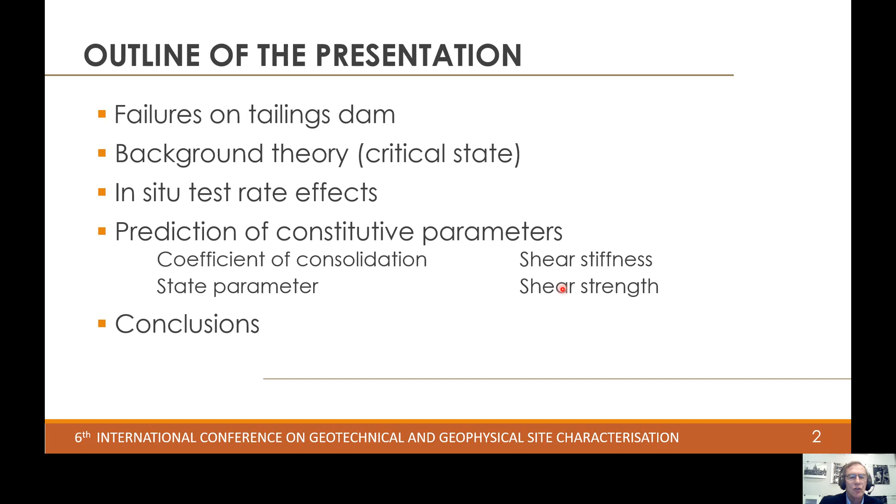The outline of the presentation is fairly simple. I'll set the grounds by discussing some experience gathered from the failures of tailing dams before moving to other technical issues, covering the background theory for the interpretation of in situ tests, concentrating on rate effects, which is a requirement for the prediction of constitutive parameters. I'll make then some brief comments on how to predict the coefficient of consolidation, state parameter, shear stiffness, and shear strength before heading to conclusions.

As an introduction, I'll try to give a general perspective of the topic, always from the geotechnical point of view. I'll start by sharing some of my personal experience that involved studying the two major recent accidents in Brazil, the Fundão and the Brumadinho Dam. I'll try to briefly highlight the lessons learned from these accidents and how they're guiding our research efforts in Brazil, which is somehow reflected in this presentation.

The Fundão Dam is an upstream construction that failed in November 2015, releasing over 45 million cubic meters of mine tailings and killing 19 people. An investigation was performed to determine the causes of the accident by a review panel that was led by Professor Morgenstern.

Field evidence have been gathered, advanced lab testing performed, and the work was supported by sophisticated computer modeling. I should remember that the structure was well maintained, monitored, and documented, although the review panel acknowledged that that structure was vulnerable by a series of unplanned occurrences.

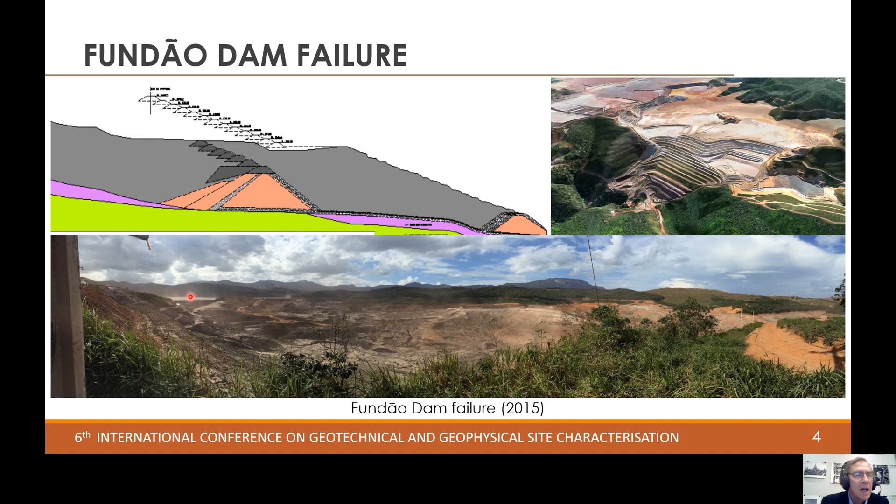This is a general view of the area two weeks after the accident, and in the background you can see the Germano Dam, which is a twin dam that is operating in the same location.

As for the Brumadinho Dam, there are some similarities, but it's worth mentioning that there were no risings after 2013, and tailings disposal ceased in July 2016. So the Brumadinho Dam was decommissioned for more than two years and a half before the accident that killed 270 people.

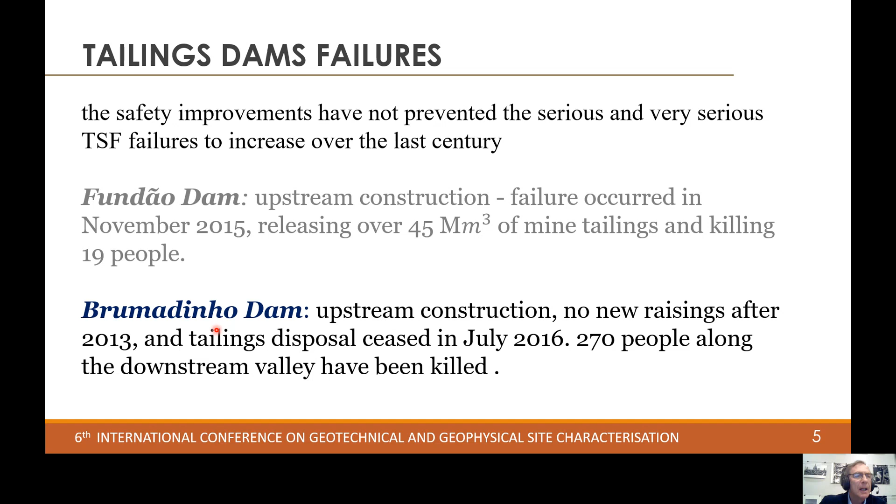Insights as to the reasons of this 2019 accident were summarized in a causation report that was led by Professor Peter Robertson. The material was described as having a brittle response, which was attributed to iron oxidation.

This failure was triggered by a critical combination of ongoing internal strains due to creep, combined with the loss of suction in the unsaturated zone that was caused by intense rainfall towards the end of 2018. Let's accept that identifying creep strains taking place inside a reservoir is not an easy problem to be approached in terms of design and in terms of evaluating risk.

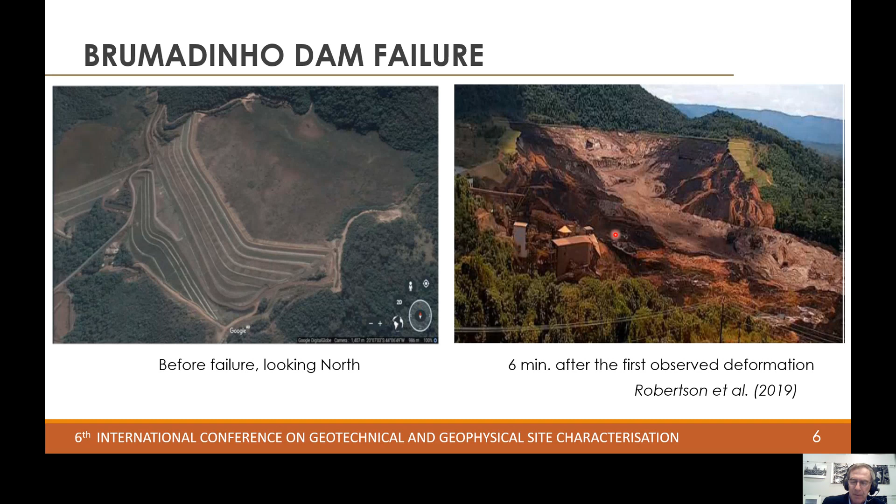Interestingly, another independent report was issued by the Brazilian Federal Police that was working in combination with an international research group, and they reached a different conclusion, attributing failure to ongoing drillings for in situ testing and for installation of instruments. So what are the lessons that one can take from these two accidents?

In both cases, we're talking about tailings that were hydraulically deposited, were non-plastic materials, and were known to exhibit high potential for liquefaction. There were no warnings in both cases. These failures have not been anticipated by the instrumentation. And in both cases, the trigger was not easily identified.

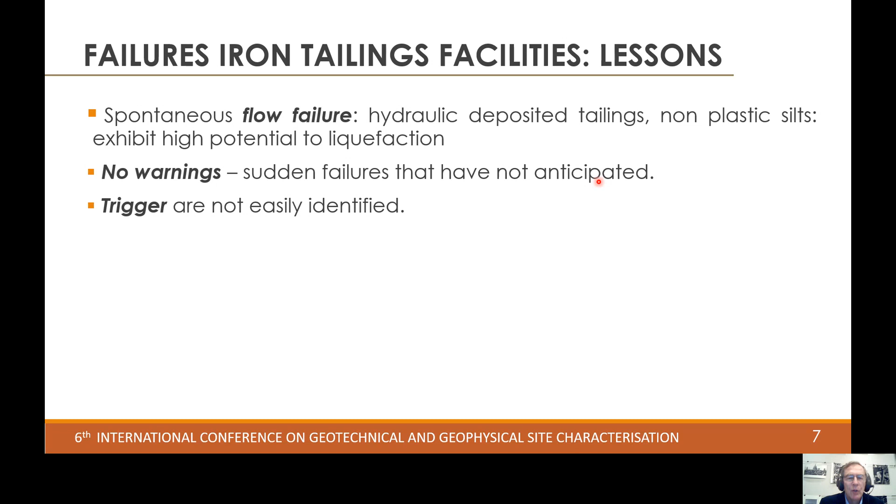I was talking about the ongoing debate on the Brumadinho failure. Although the mechanism itself was not easily perceived, we know that it is geotechnical. So it's up to the geotechnical community to react and improve our ways of estimating the strength, the stress, strain, and strength behavior of these materials, and to identify their contractive response.

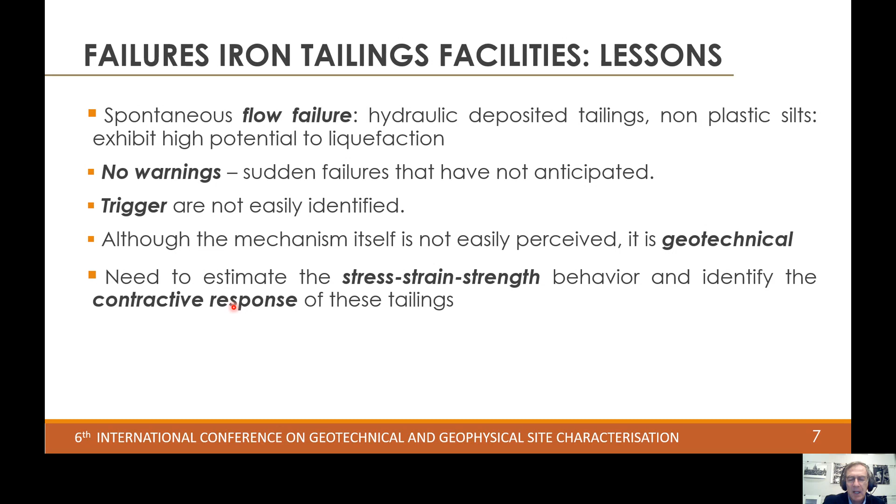And that's exactly the aim of the present presentation. I'll then move to more technical issues, as I mentioned before, and I'll start with critical state soil mechanics.

There is no intention to review the theory, but just to highlight some aspects of behavior. The mechanism of soil liquefaction, or the stress-strain behavior of this material, can be described by critical state soil mechanics without requiring new soil properties or concepts to be added.

I'll illustrate this behavior by the results of triaxial compression and extension tests performed in gold tailings. From these tests, we could derive the critical state line, and there are some important aspects to discuss. The first is that the tested tailings show a unique critical state line, which is one of the axioms of critical state theory.

But there is a characteristic feature of these tailings: the critical state line exhibits a marked curvature dictated by transitions of state, going to full liquefaction, to flow instability, to a stable zone, and eventually to particle breakage at very high stresses.

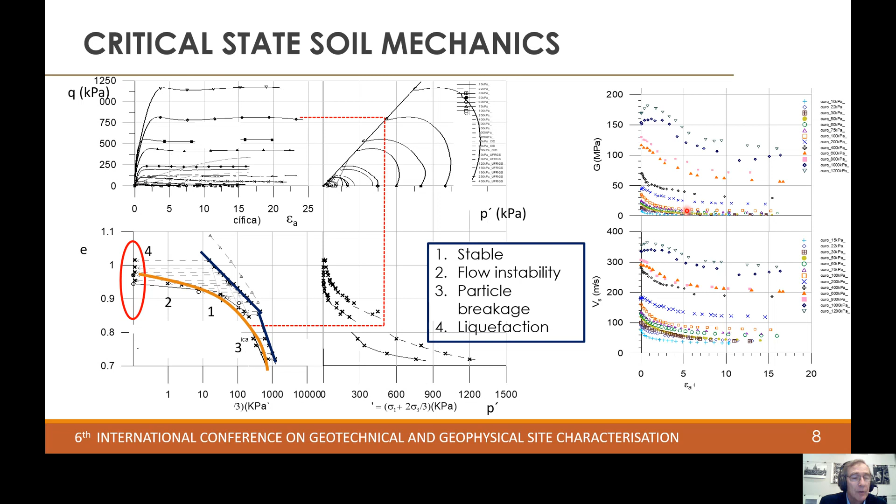An additional feature worth mentioning is the requirement for measuring the shear stiffness by bender elements, because strength and stiffness are coupled, and by coupling these two quantities we improve our ability to derive soil properties from the interpretation of in situ tests.

There are more than 20 to 30 constitutive models developed for sands, some of which have already incorporated nonlinear equations to express the shape of the critical state line. So what is the question mark?

We aim at determining the constitutive parameters in tailings, combining in situ and lab tests, having critical state soil mechanics as the background theory. For lab tests, we can use undisturbed or reconstituted samples, but given the difficulty of retrieving undisturbed samples in silty sands, one usually resorts to reconstituted samples.

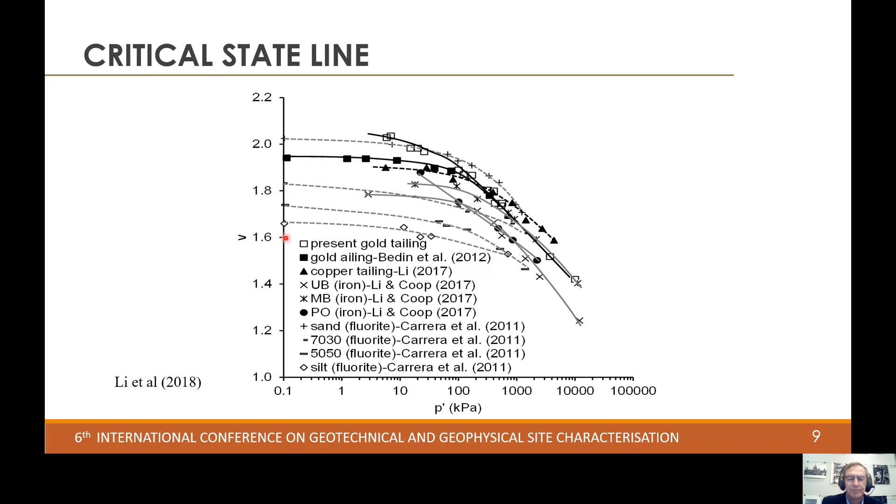We are now moving to in situ tests, and we will concentrate on rate effects, because in these intermediate permeability materials, the standardized testing rate may lead to partial drainage, and thus to erroneous estimation of undrained parameters.

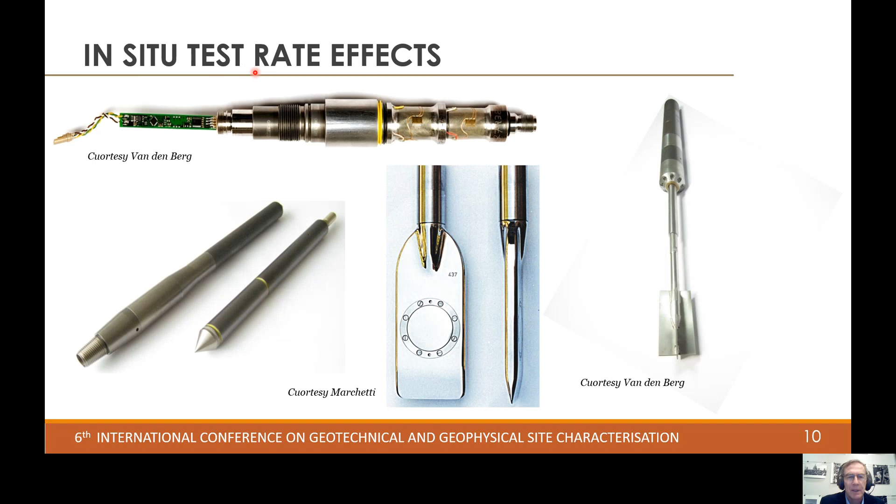We do that by expressing results of different in situ tests as a function of the normalized velocity. The normalized velocity is a classical concept that comes from pore fluid pressure diffusion in linear poroelastic mediums.

There are several expressions proposed on the basis of this concept, and they all capture the key elements needed for in situ testing interpretation. Here you find one example that relates the normalized cone resistance to the normalized velocity. This plot combines centrifuge, calibration chamber, and field tests.

A simple observation of the reported data shows that the influence of partial drainage on cone resistance is significant in all materials. If you see the red line, which represents gold tailings, this is the normalized cone resistance representing the drained value relative to the undrained value, taken at a much higher normalized velocity.

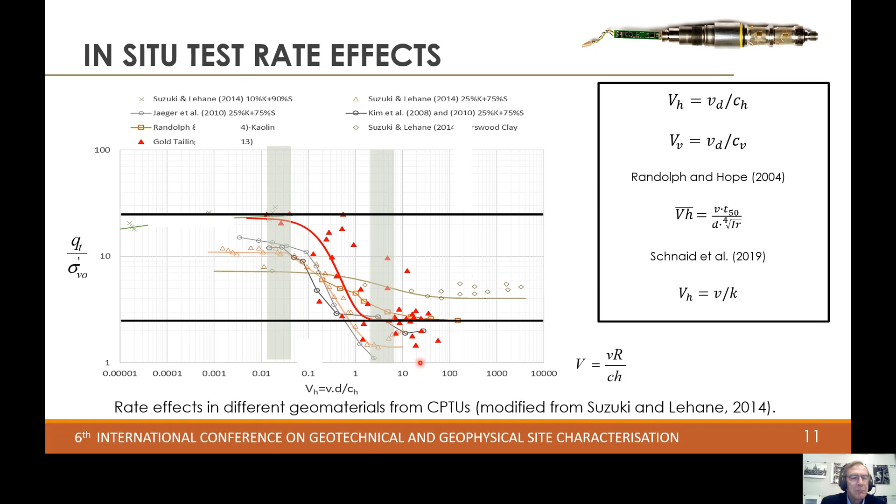So I think you're kind of familiar with this concept, and the idea is how to approach this problem in engineering practice. There are essentially two alternatives to be considered.

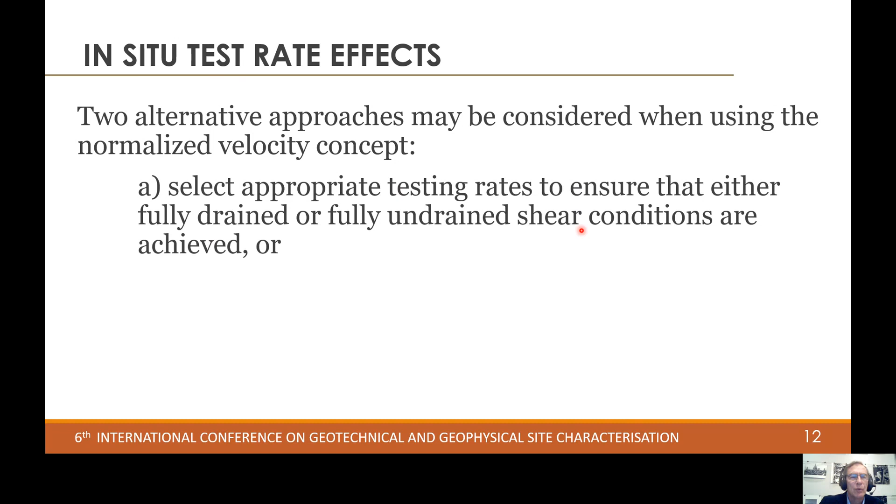The first alternative emerges from the previous explanation: non-standard penetration rates or testing rates may have to be selected according to local experience, in order to ensure that either fully drained or fully undrained shear conditions are achieved.

But there is another alternative, one that I think is required and has not been extensively discussed by the geotechnical community. There is a large, comprehensive database of in situ tests carried out according to international reference test procedures. I think the question is whether we are able to correct these in situ measurements to account for the possible errors induced by pore pressure dissipation. This latter approach will be discussed herein.

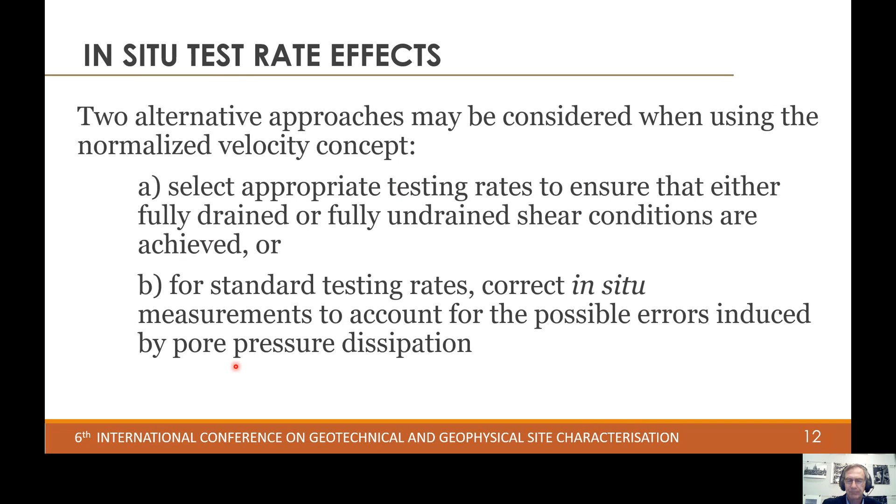I'll show this by looking at different in situ tests, starting with piezocone tests, by the interpretation of piezocone tests. I'll start by quantifying the maximum error in calculating the shear strength, given by calculating the normalized drained-to-undrained cone resistance, which is here plotted against the internal friction angle.

The predictions are based on a fairly simple rigid plastic model that has been calibrated against recent published data, including tailings. As you can see, this model prediction yields a ratio of drained to undrained cone resistance on the order of 10, or as high as 10. This ratio can be approximated by an exponential function. So when trying to make corrections, one has to be careful.

It needs engineering judgment because this correction can be quite high. But besides, it's possible to provide guidelines for design by directly correcting the tip cone resistance recorded at the standard penetration rate of 20 millimeters per second in order to calculate an equivalent fully undrained penetration resistance. This is done also by a fairly simple expression that is a function of the internal friction angle and BQ. So the proposed expression should be seen as a first approximation supported by experimental data that stands until more rigorous solutions are derived.

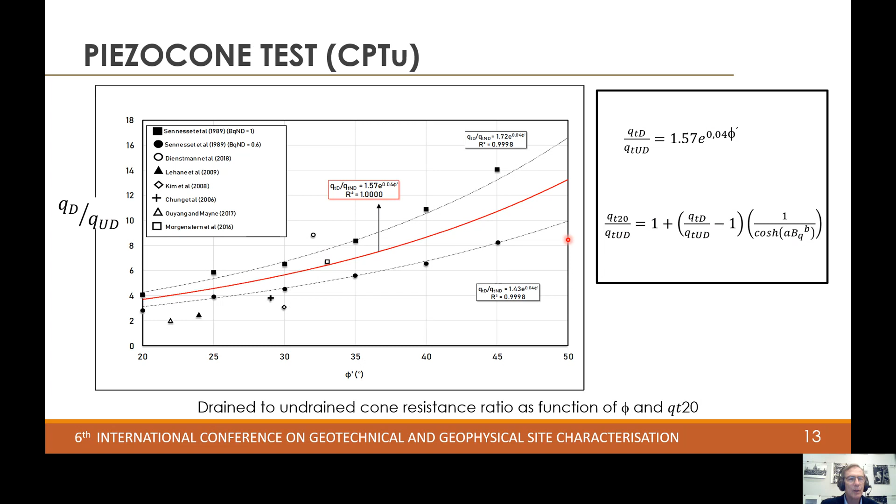So this was the first example. The second example is related to the vane test, to field vane tests. And I suppose that this is a fairly important and interesting test to be discussed because it is a reference test for clays. But the standard rate of vane rotation of 0.1 degrees per second that ensures undrained conditions when shearing clays may not be applicable to estimate these values in silts, in transitional soils.

So we've got to evaluate what is the possible error that is inherent to this type of test in silty tailings. This is one example. You see some results where the torque is being measured at different rotation rates. But when one tries to evaluate the drained curves from the measured torque expressed as a function of the normalized velocity, there is an experimental problem.

For being able to go from undrained to drained torques, we would have to increase the rotation rates by 1,000 times, which we are still unable to do. So the alternative is not relying just on measured data, on experimental data, but we have to extrapolate the curve to get an entire description of the drained conditions taking place on a rotation vane.

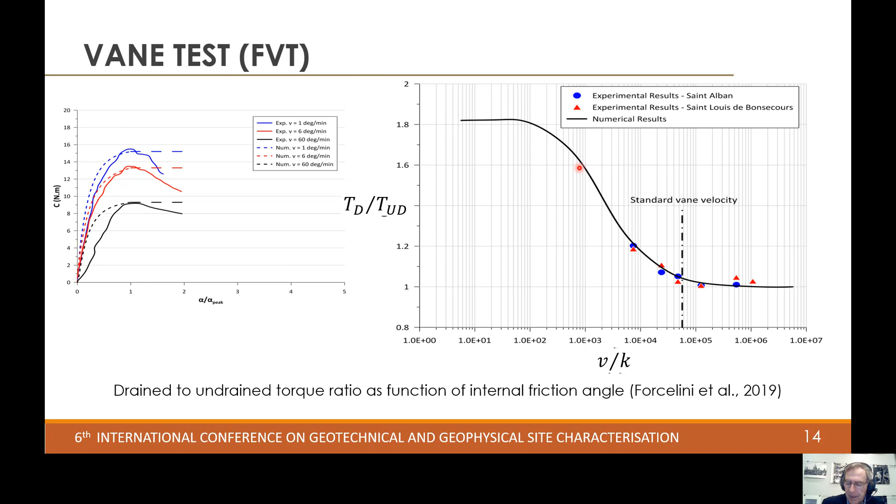And this has been done in this particular example, considering a poromechanical analysis of consolidation induced by the rotation not of a vane, but the rotation of an infinite long rigid cylinder embedded in a porous medium. And the results are quite interesting. The study demonstrates that the ratio between the drained and the undrained torque is governed by the internal friction angle.

The model predictions are generally lower than 2, some of this order, which is much lower than the values calculated for the piezocone. This can be explained by the fact that the volumetric strains induced by vane rotation in a drained regime are moderate in comparison to values calculated by cavity expansion, which is related to the piezocone. So corrections are relatively small, and we may be tempted to use this type of approach for correcting the vane tests.

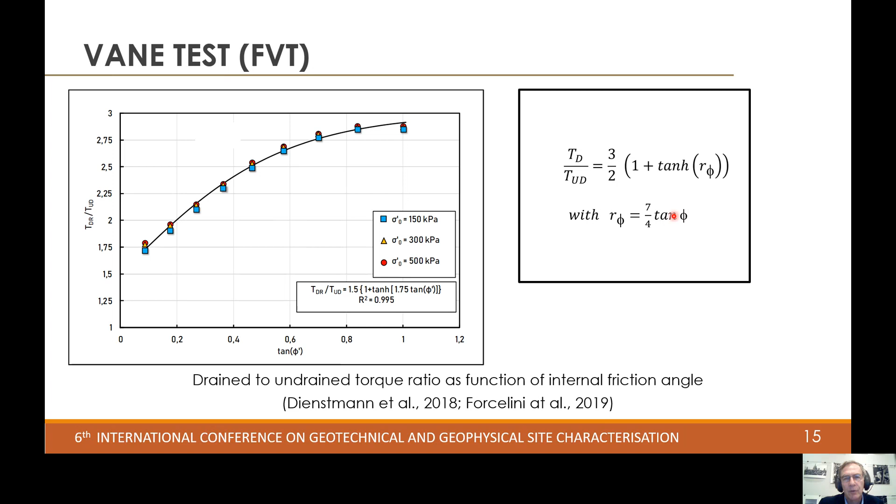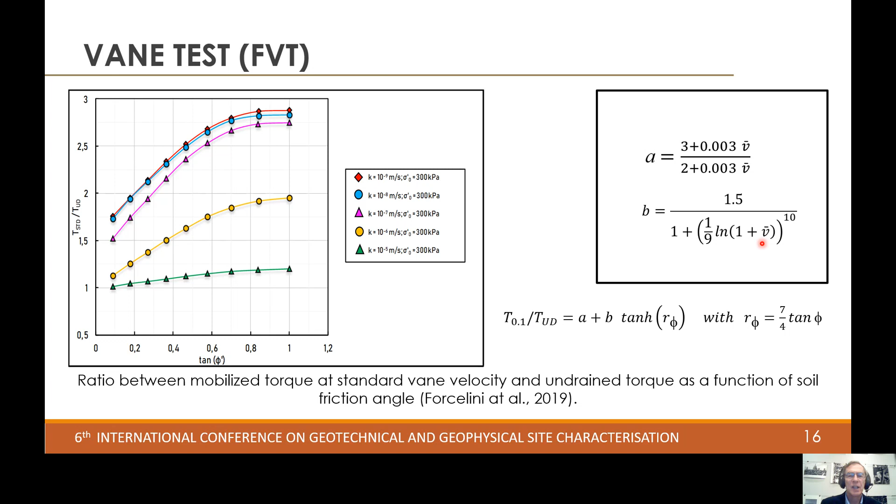Incidentally, the ratio is described by a hyperbolic function expressed, of course, as a function of the friction angle. If you want now to extend this approach to formulate an approximate expression to correlate the measured torque, or the torque measured at a standard vane velocity, in comparison to its counterpart under undrained conditions, it is also possible, and is expressed by a very simple equation that's a function of the internal friction angle and the normalized velocity. So this is a ready-to-use equation if one tries to derive soil parameters from vane tests in silty soils.

I'll now move to something that's slightly different, because with the dilatometer, it's not possible to make a correction of the test data. But what we have to do is an adaptation of test procedures. To be fair, since the early days, Silvano Marchetti has acknowledged that in transitional soils, the after-installation DMT readings are changing continuously with time due to excess pore pressure dissipation.

So we are using this decay curve for what is being called an integrated approach. After completion of the pore pressure dissipation at the minimum lift-off pressure, the membrane can be inflated, and these values can be used to derive or to estimate the internal friction angle. Alternatively, we can extrapolate this curve back to the origin to get an equivalent undrained lift-off pressure, and this can be used to predict the undrained shear strength.

Of course, as for the CPT, if the penetration process of the DMT is partially drained, the extrapolation to determine this value will be incorrect. There is a new device, and I would like to call your attention to that, the Medusa DMT, that is able to monitor the variation of A-reading with time, and that enhances our ability to use the DMT for interpretation of testing data in silts.

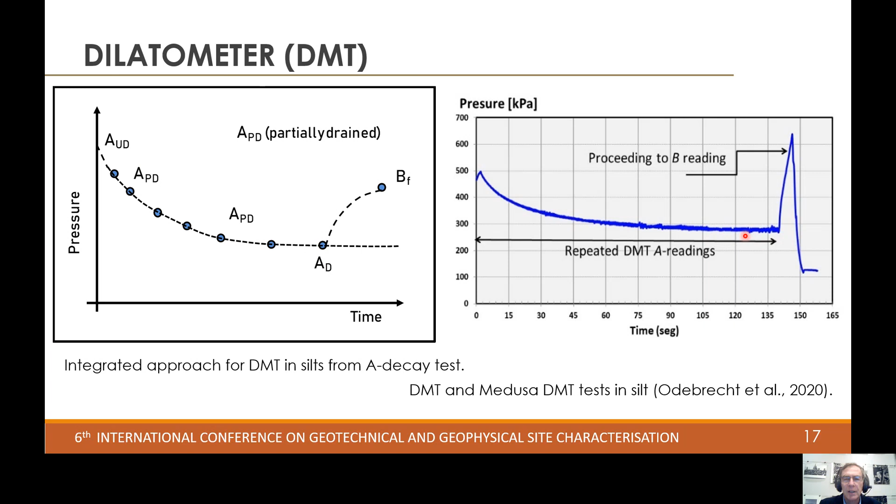I'll finally move to the standard penetration test, which is a slightly more complicated and controversial issue, but I'd like to make some comments on that. When you talk about dynamic penetrometers, we know that the results exhibit poor repeatability. There is a lack of standardization of test procedures and unknown values of energy delivered to the SPT rods, as well as variable penetration rates during a single blow, which are limiting factors that may result in misleading predictions when using this information.

As a means of assessing liquefaction, the SPT fulfills the need for retrieving disturbed soil samples to determine the water content, fines content, and Atterberg limits. But in granular soils, there is another alternative which I like to highlight for you in this presentation.

For tests carried out under drained conditions, we developed a rigorous solution to circumvent some of the inherent limitations associated with SPT interpretation by calculating a dynamic force. This force is simply calculated using the principles of energy conservation and wave propagation analysis, with no empirical or adjustment factors.

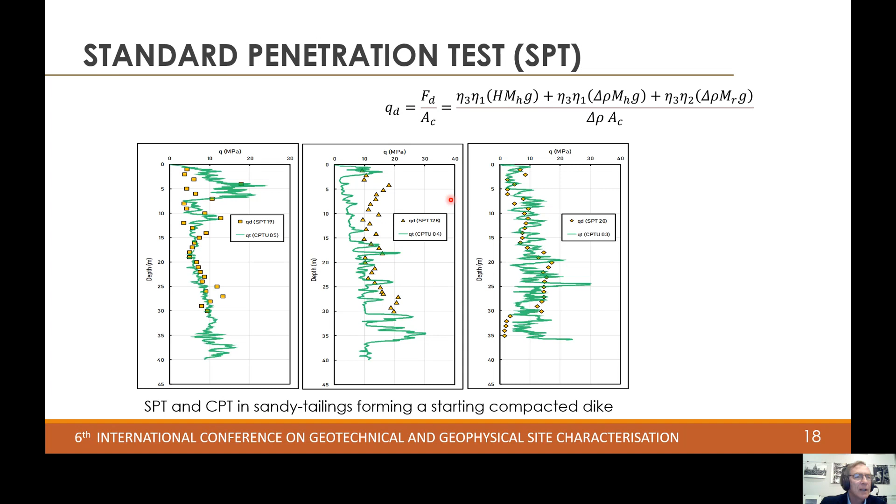So when using this dynamic force, we can calculate an equivalent dynamic penetration, and we can compare the results of the SPT with the results from the CPT, which are shown here in green for several logs carried out on a dike. You see that in this particular example, there is a consistency between SPT and CPT records that allows a direct comparison between all these tests.

So we do analysis and account for rate effects, and we are then able to derive constitutive parameters in tailings. There are two major principles for that. First, rate effects have to be considered either by correcting the measured data or by making adaptations in test procedures, which we have discussed previously. Second, there is a need to combine field and lab tests.

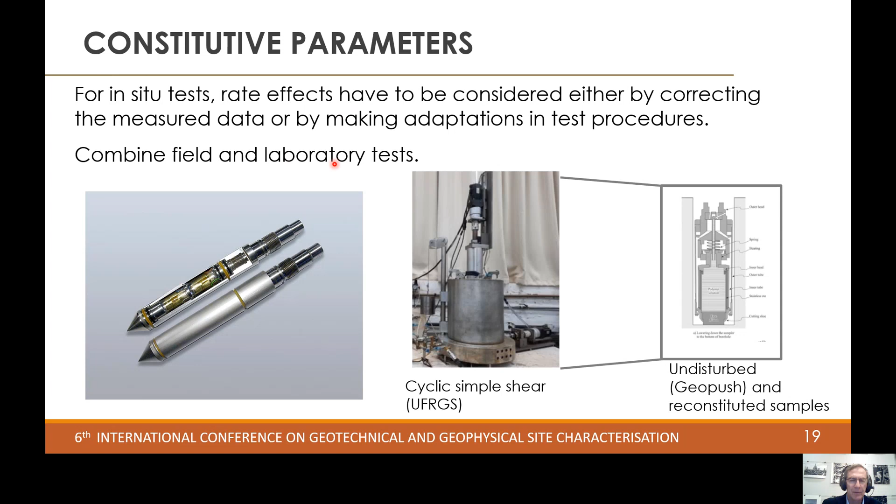So let's give some examples. Some of them I will discuss briefly, and some I will concentrate on in a slightly more detailed way. We can look at stiffness.

If you talk about soil stiffness, it is well recognized that geotechnical site characterization can be improved by independent seismic measurements, adding the downhole shear wave velocity to the other in situ testing data. As a matter of fact, the small strain stiffness G0 is among the most reliable and easy constitutive parameters to measure, both in the field and in the laboratory.

Conversely, if you look at the coefficient of consolidation, this is more complicated because partial drainage effects during piezocone penetration may violate the boundary conditions assumed in the interpretation of piezocone dissipation tests, whether using one-dimensional cavity expansion or two-dimensional strain path methods, from which both contractive and dilative soil response can be modeled. And this is not to mention the uncertainties in determining the phreatic surface location in tailing dams. So you see that the approach for each of these parameters has to be properly evaluated from some physical assessment of what is involved.

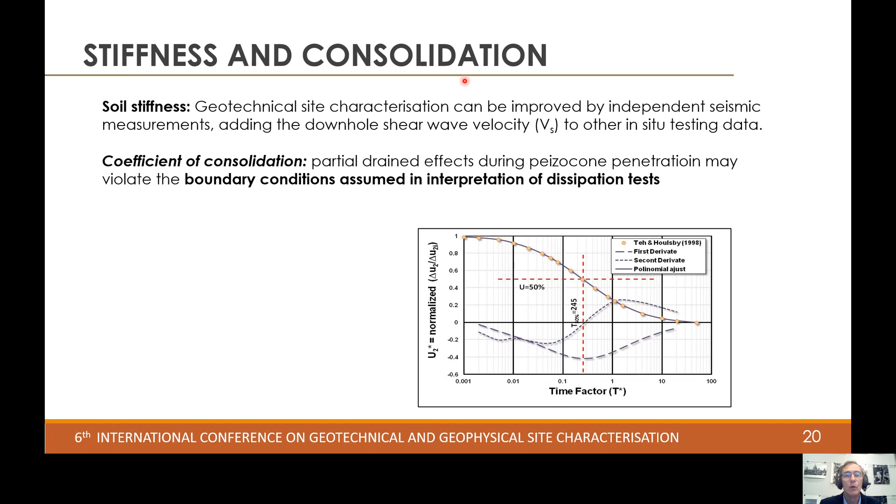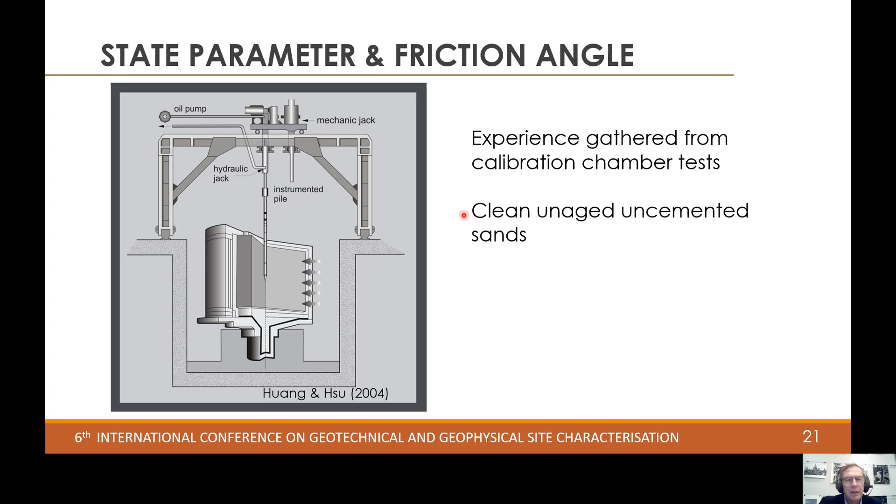In the interpretation, if we move to drained properties, we can look at the state parameter or the internal friction angle. And I recall that here we rely less on theory and more on experience gathered from calibration chamber tests, recalling that most of the tests were carried out on clean, unaged, uncemented sands.

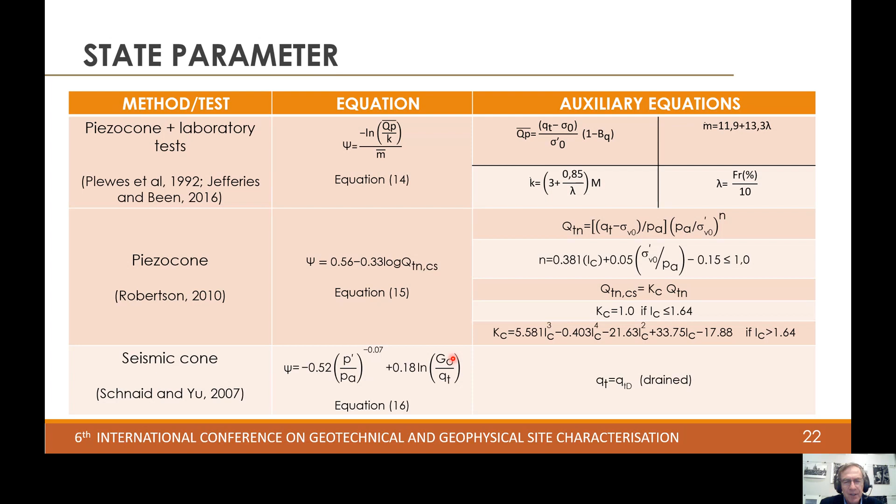As a matter of fact, current engineering practice when trying to derive the state parameter relies heavily on correlations established from CPT measurements, as you can see here from the work of Jefferies, Been, and co-authors, or Peter Robertson. But there are other alternatives, such as the seismic cone, in which the state parameter is assessed from a combination of G0 over QT, a small to large strain ratio, which enhances our ability of deriving the state parameter. We can also rely on the cone pressuremeter or on the dilatometer. These are ready-to-use equations that are generally used in engineering practice.

But I'll try to illustrate the state parameter variation derived from seismic CPT tests carried out on a beach very close to the upstream face of a tailings dam, towards the right and left abutment respectively. And as you can see here, it's interesting because the two CPT-based methods yielded fairly similar trends. But by adding the contribution of soil stiffness, the SCPT-based state parameter variation agrees sufficiently well with the CPT values in the right abutment, but indicates a predominance of dilative tailings in the left abutment.

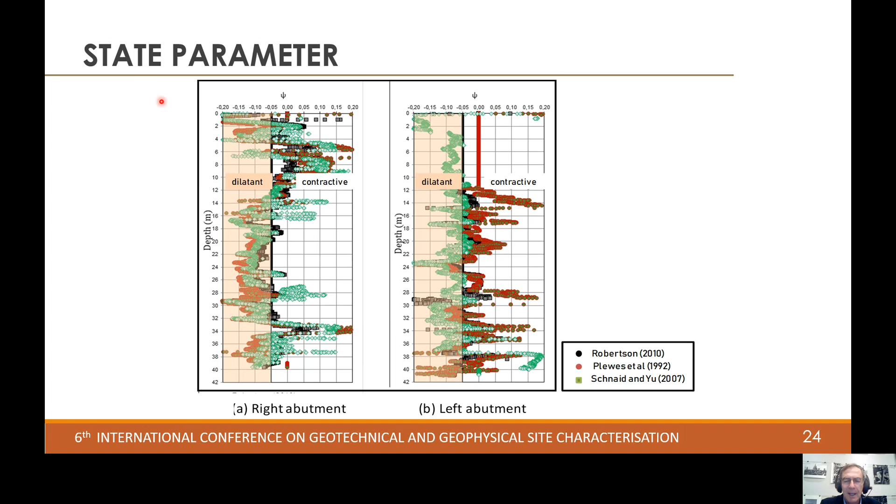So why am I bringing this example? It's to draw your attention to the fact that none of these methods give a correct estimation of the state parameter in non-plastic silty tailings. They should be seen as an approximation because the influence of fines is not completely understood, and cavity expansion methods used to calibrate these approaches were essentially based on clean sand. So this type of approach should be viewed as a first step, guiding the need for further investigation.

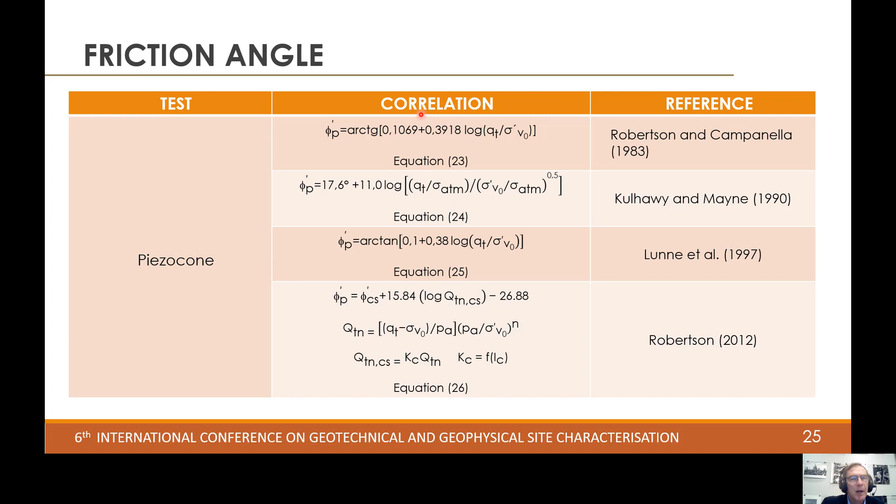I'll make some comments on the internal friction angle, but I think they're fairly similar. Correlations with cone tests are widely used in engineering practice to derive internal friction angles, but alternative methods include the seismic cone, the cone pressure meter, the dilatometer, and even the SPT.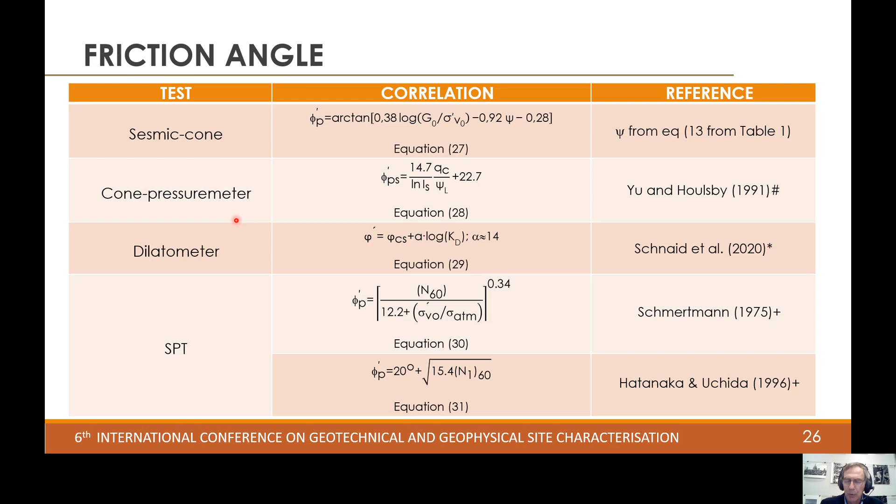But recall what I was saying for the state parameter. For the same reasons, these correlations should be viewed as a first approximation in silts or silt tailings. So as a general recommendation, apply these correlations in silts using the critical state friction angle as a reference value. In other words, always carry out triaxial compression tests to determine the critical state friction angle, and then compare your correlations against this property, which is easily determined from different materials.

As a guideline for design, we try to establish a correlation between the critical state angle and the mean particle size for different non-plastic tailings. As you can see, most internal friction angles for different silty tailings fall within a narrow range of about 31 to 35 degrees, despite the variability in mineralogy and particle shape expected for this material. This scatter seems to be much lower than the one observed for sands.

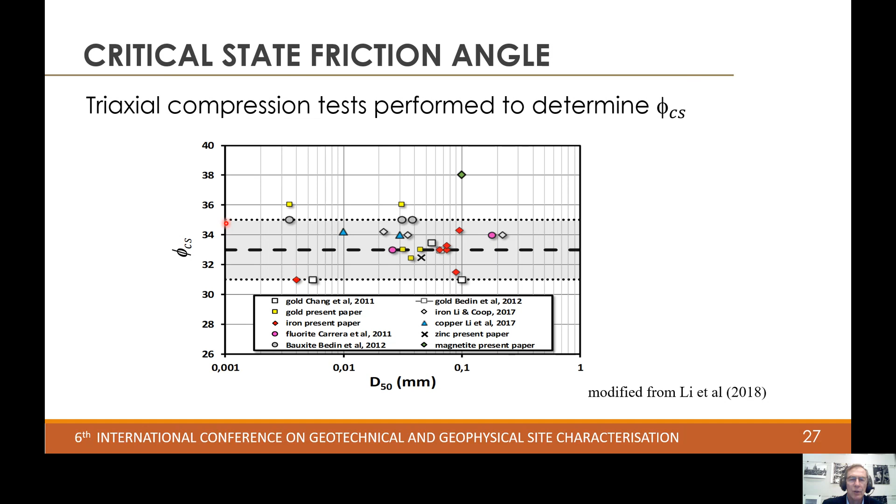We can now move to the final part of this presentation, to make some comments about our ability to predict undrained shear strength. We know that undrained shear strength in tailings, as in all soils, depends on the mode of failure, the rate of shearing, soil anisotropy, and stress history. Therefore, it is not a unique soil parameter, being strongly dependent upon the method by which it is determined. This is a problem, but on the other hand we can rely on the concepts of critical state soil mechanics as long as rate effects are properly taken into account.

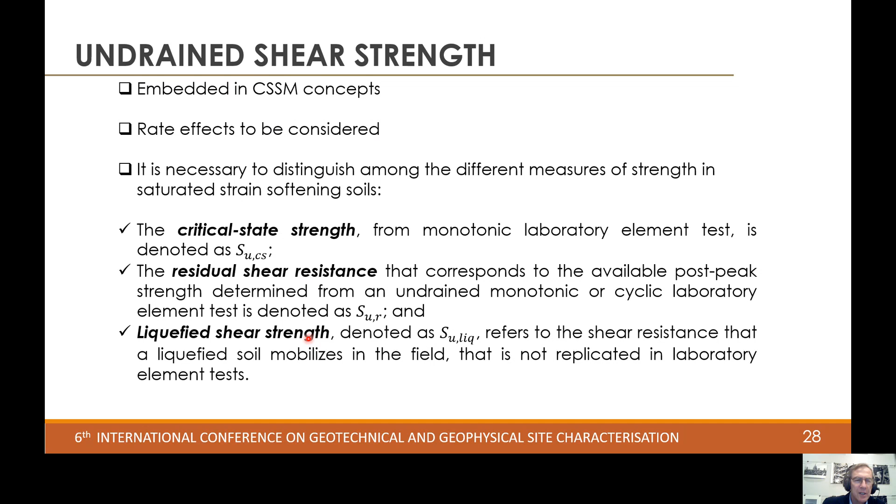However, there is again one complicated issue. In discussing the shear strength of liquefied soils, it is necessary to distinguish among the different measures of strength in saturated, strain-softening soils. We can be talking about the critical state strength, the residual shear strength, or even the liquefied shear strength, which incidentally is not replicated in lab element tests. So let's see how we approach this value.

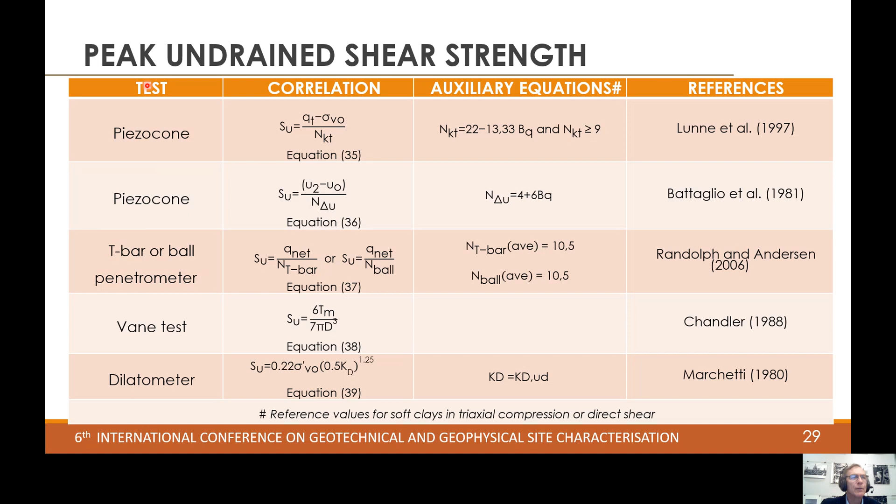If we are talking about the peak undrained shear strength, we are on familiar ground, so I don't have to extend on that, because we know we can rely on the piezocone, the full-flow penetrometers, the vane tests, or the dilatometer to derive these quantities using well-known equations.

However, estimating the residual post-liquefaction undrained shear strength is another matter if we're talking about materials susceptible to liquefaction. Essentially, that's not even a geotechnical problem - it's more related to soil rheology, because the material behaves as a non-Newtonian fluid. So current engineering design practice tries to overcome this.

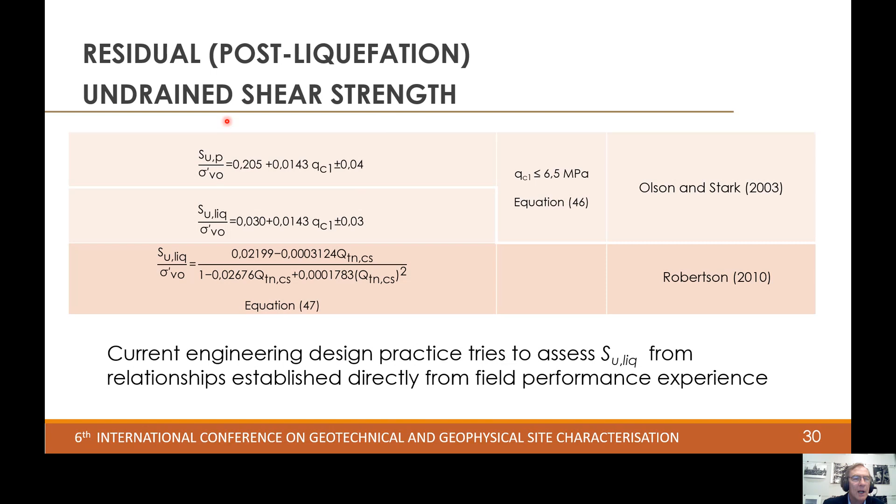Uncertainty in assessing Su comes from relationships established directly from field performance experience, and there are all sorts of uncertainties associated with this type of approach. I even recall that new guidelines require the strength reduction to be applied to all materials independently, whether the factor of safety against liquefaction is greater or less than 1. So if this parameter becomes a key parameter in design, it's got to be measured, and we've got to improve our ability to estimate this value.

One alternative I'd like to call your attention to, related to current research carried out in Brazil, involves the full-flow penetrometers - I'm talking about the piezoball or the T-bar. You see here a set of interesting results in which the undrained shear strength, or its variation with depth, has been evaluated at this location, but the probe has been halted at given depths to perform unload-reload cycles, from which the strength reduction could be evaluated.

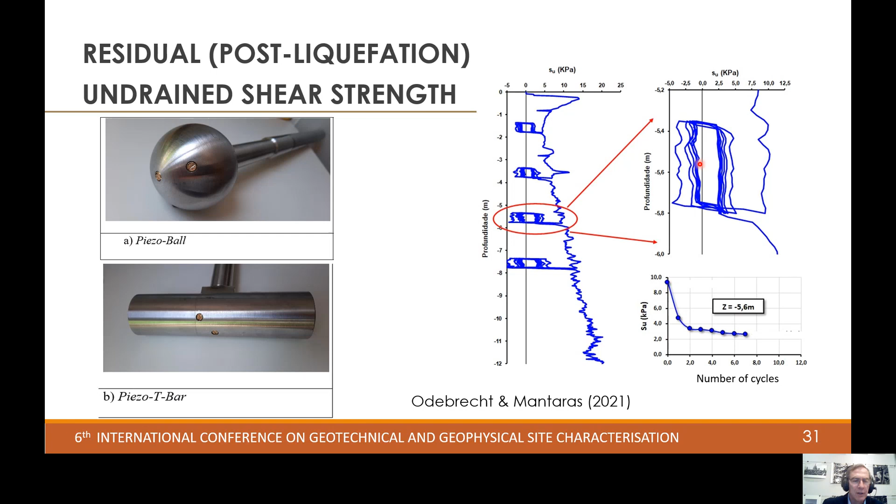What is interesting about these results is that these tools are research tools in which pore pressure is measured in 3 different locations - one in the hemisphere, one in the pole, and another one in the meridian, if you like. So the idea is to look at pore pressure generation and dissipation to see if we can identify the mechanisms associated with strength reduction in different geomaterials.

So these were some of the aspects I would like to discuss, and I think conclusions have been drawn throughout this presentation. We understand that the challenge for us is to derive constitutive parameters - this is the core of the various geotechnical analyses required throughout the lifetime of geotechnical structures.

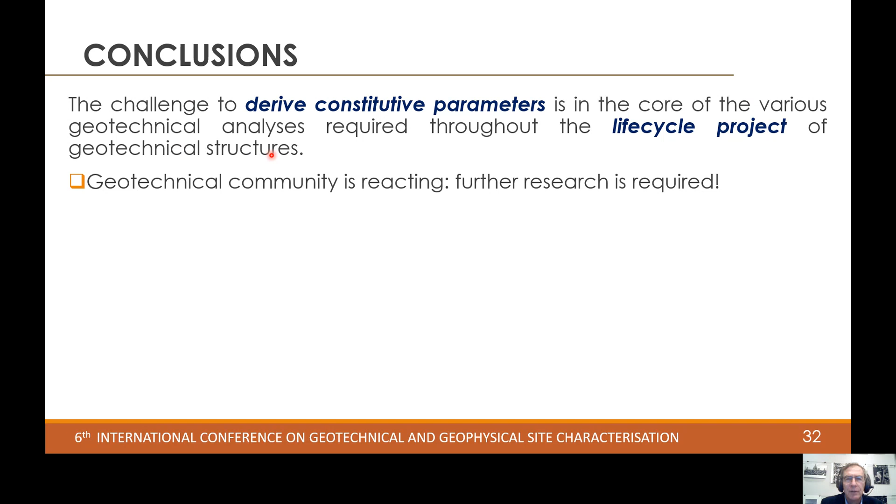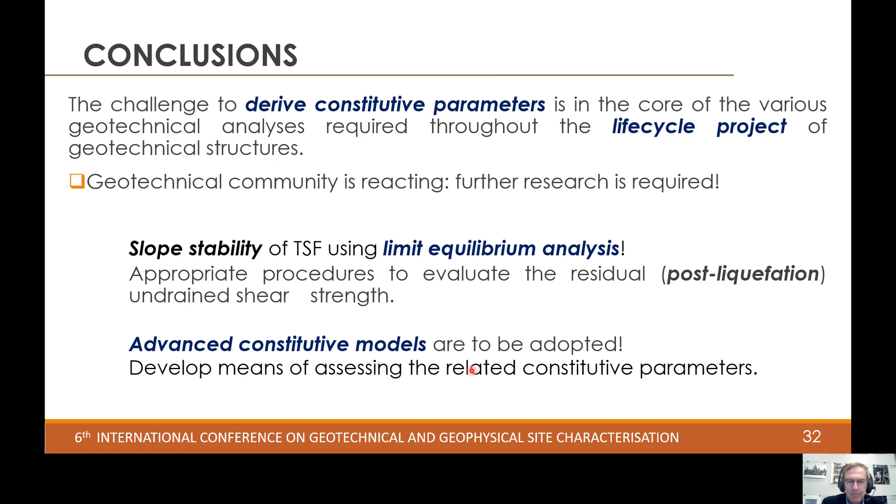The geotechnical community is reacting to the challenges that have emerged from these accidents, but further research is needed. I'll leave you with two questions. If slope stability of tailing storage facilities should be addressed using limit equilibrium analysis, we've got to enhance our ability to develop appropriate procedures to evaluate the residual post-liquefaction undrained shear strength - an aspect highlighted throughout this presentation. If, on the other hand, advanced constitutive models are to be adopted, we've got to develop means of assessing the related constitutive parameters. So having said that, I complete this presentation, and thank you very much for your attention.